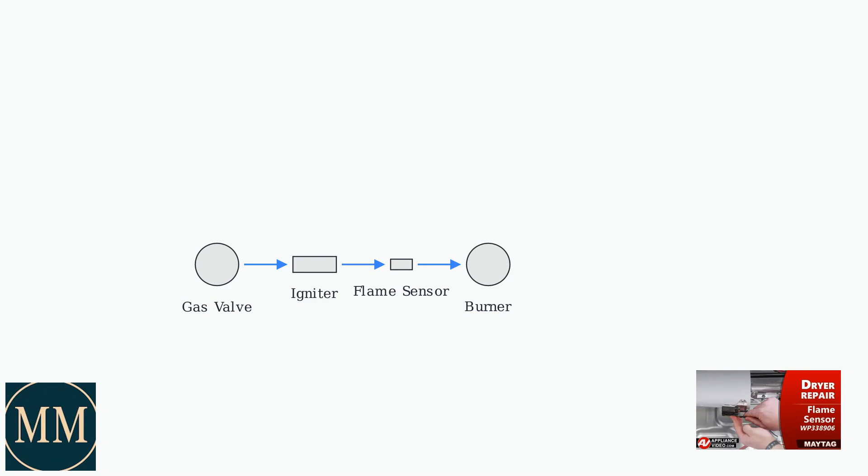Here's how gas flows through the system, from the gas valve to the igniter, then to the burner. The igniter is a glowing element that lights the gas. Gas valve coils control the gas flow. The flame sensor detects the flame to maintain gas flow. These parts work together to ignite the gas and maintain the flame. When one fails, the dryer runs but produces no heat.

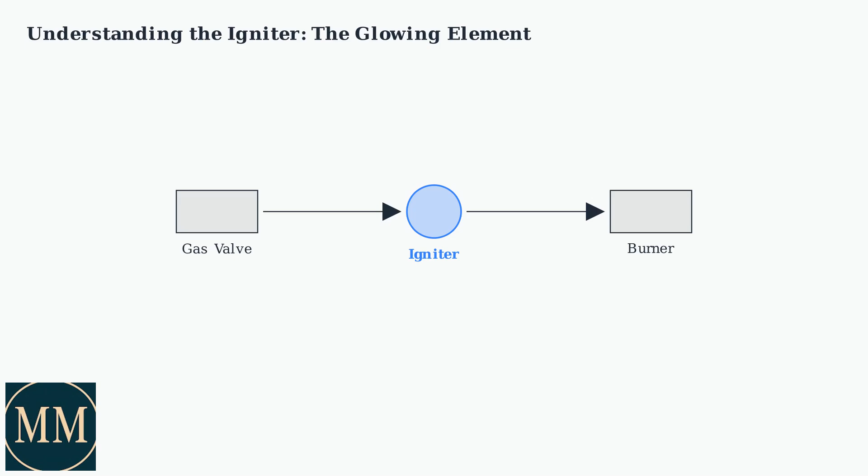The igniter is the glowing ceramic element in your Maytag gas dryer that heats up to ignite the gas. Here's how it works: gas flows from the valve to the igniter, which glows hot to light the gas before it reaches the burner. The igniter often fails due to breakage, lint buildup, or electrical shorts. When faulty, it prevents the gas from lighting, resulting in no heat for drying.

Gas valve coils are electromechanical solenoids that open the gas valve when energized by the control board, allowing natural gas or propane to flow to the burner. Here's how the gas flow works: the control board sends electricity to energize the coils, which magnetically open the valve, releasing gas that flows to the burner where it meets the glowing igniter.

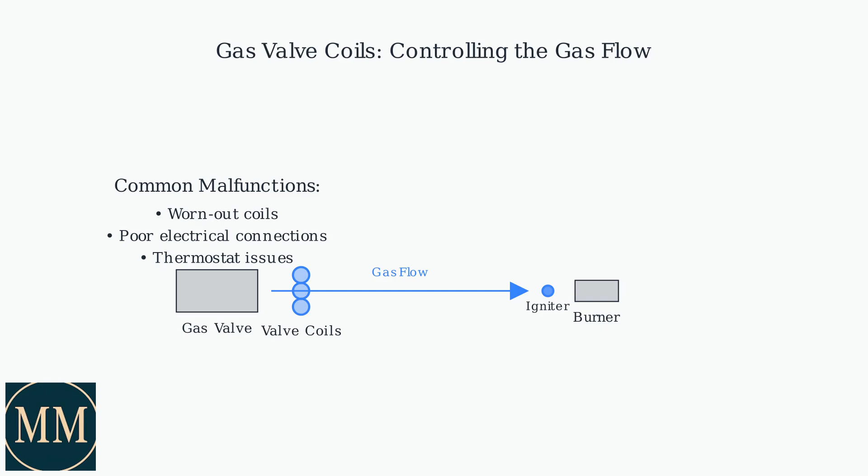These coils can malfunction due to worn-out solenoids, poor electrical connections, or thermostat problems, blocking gas flow even when the igniter is glowing properly. The result is a dryer that runs but produces no heat, as gas cannot reach the burner to create the flame.

This gas valve anatomy shows the key components, including the coils that control gas release. To diagnose coil issues, technicians use multimeters to test electrical continuity and resistance.

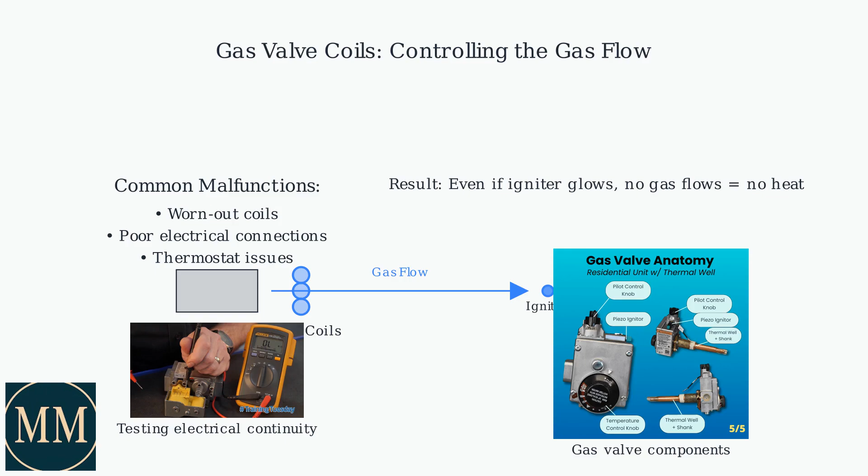The flame sensor is a crucial safety component in Maytag gas dryers. It's a metal rod positioned near the burner that detects the presence of a flame by sensing heat. When the gas ignites and produces a flame, the sensor conducts electricity better due to the heat. If no flame is detected, it immediately signals the control board to shut off the gas valve, preventing dangerous gas buildup.

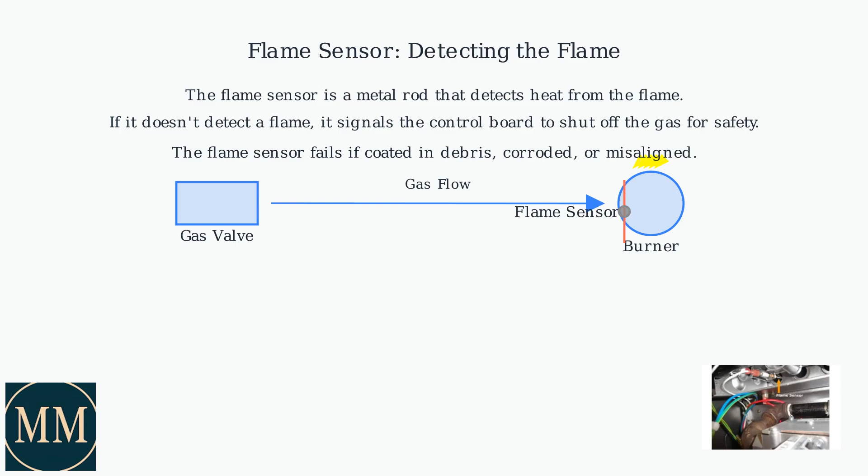The flame sensor can fail due to common issues like lint and debris buildup that insulate it from heat, corrosion from moisture, or misalignment that prevents proper flame contact. To fix a failed sensor, gently clean it with fine steel wool to remove debris, or replace it entirely if it's damaged or corroded beyond repair.

Start troubleshooting by understanding the gas flow path in your Maytag dryer. Gas flows from the valve to the igniter, then to the burner, with the flame sensor monitoring the process. First, ensure your gas supply valve is turned on and the dryer has adequate gas pressure. No gas means no heat, regardless of other components.

Next, inspect the dryer venting system for blockages or restrictions. Poor venting can prevent proper airflow and cause heat issues. Check for lint buildup, kinks, or excessive length.

Start a drying cycle and observe if the igniter glows orange for 20 to 30 seconds. The igniter heats to ignite the gas. If it doesn't glow, it's likely faulty from breakage or contamination. If the igniter doesn't glow, replace it. This is the most common cause of no heat issues, often due to lint buildup or electrical failure.

If the igniter glows, but there's still no heat, check the gas valve coils and flame sensor. Coils may be worn out, or the sensor may be coated in debris, preventing flame detection.

Use a multimeter to test electrical continuity. Check igniter resistance, 2 to 4 ohms, gas valve coil continuity, and flame sensor voltage drop when heated. This confirms if components are functioning electrically.

A common DIY fix for a faulty flame sensor involves cleaning it with steel wool to remove built-up debris and restore conductivity. Before cleaning, the voltage might read 0 volts due to contamination. Use steel wool to gently scrub away lint and debris from the sensor rod. After cleaning, when the flame is present, the voltage should jump to around 1.2 volts, indicating proper flame detection.

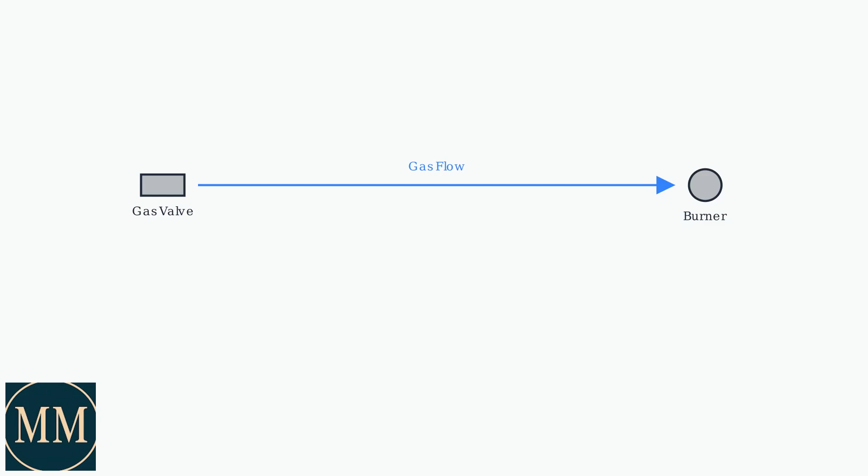This simple fix can save you a service call. Refer to Repair Clinic's videos for visual guidance on the cleaning process. The gas flow path runs from the gas valve through the burner, where the cleaned flame sensor ensures proper ignition.

Many newer Maytag models from 2025 onward feature built-in self-diagnostic modes that you can access directly through the control panel. These diagnostics allow you to run specific tests, such as checking igniter resistance and flame sensor voltage, which are crucial for the gas flow system.

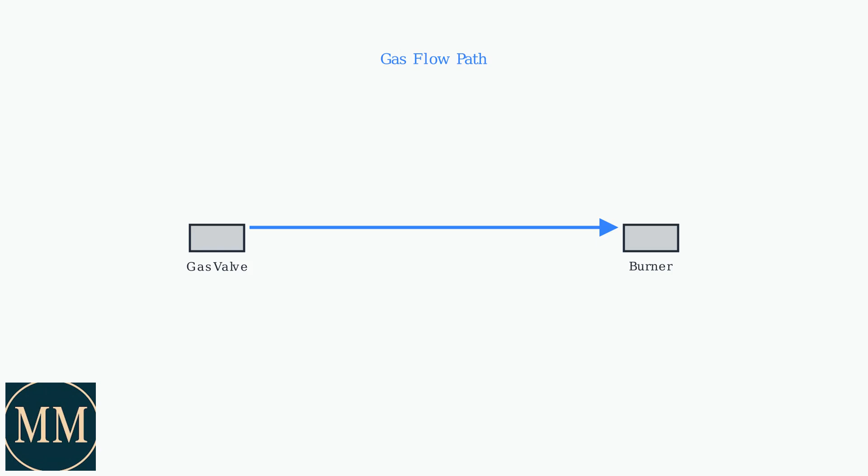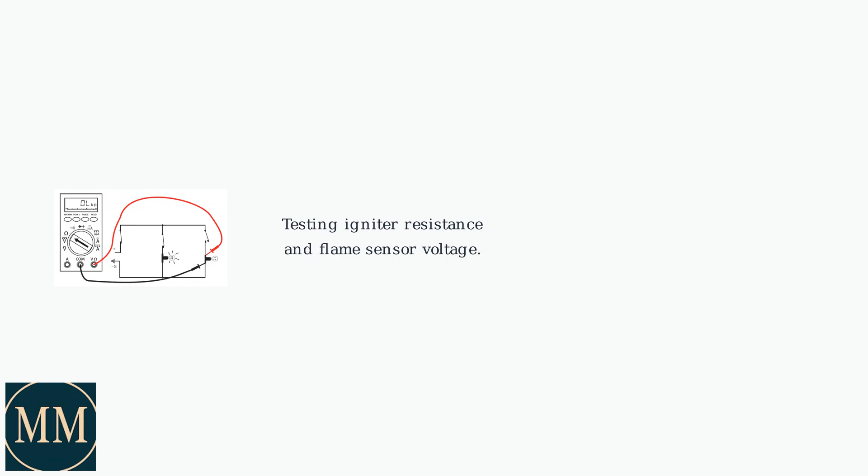You can test igniter resistance, which should typically measure between 2 to 4 ohms, and flame sensor voltage, which drops to near zero when a flame is detected. Advanced models may include IoT connectivity, enabling remote diagnostics through smartphone apps that alert you to potential issues before they become serious problems.

Future dryers will feature solid-state igniters and wireless sensors, making replacements easier and more reliable. Proper venting is essential to avoid many heating problems in gas dryers. According to the Appliance Repair Institute, 70% of no-heat issues stem from igniter or sensor failures. Regular maintenance, like cleaning the lint trap after each use, can prevent expensive repairs. This animated diagram shows the gas flow path from the valve to the burner, highlighting the critical components.